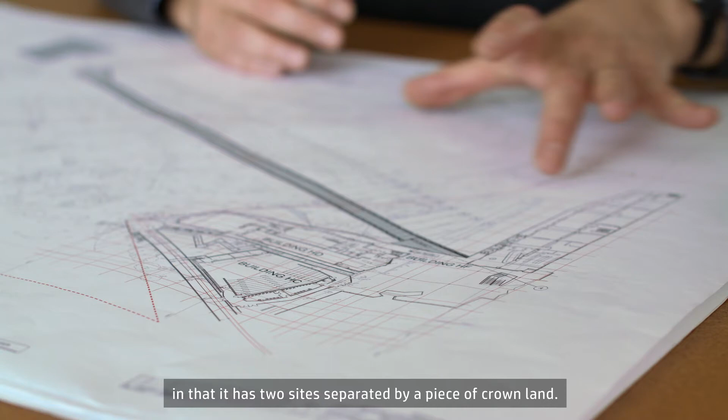The Deakin University pedestrian bridge is a link. There's a significant problem at present with the Burwood campus in that it has two sites separated by a piece of Crown land. For students or even patrons of the community to cross that Crown corridor, you have to go down to Gardeners Creek into the bushland, across a small bridge, and then make your way up a set of temporary stairs, which isn't really conducive to students with disabilities.

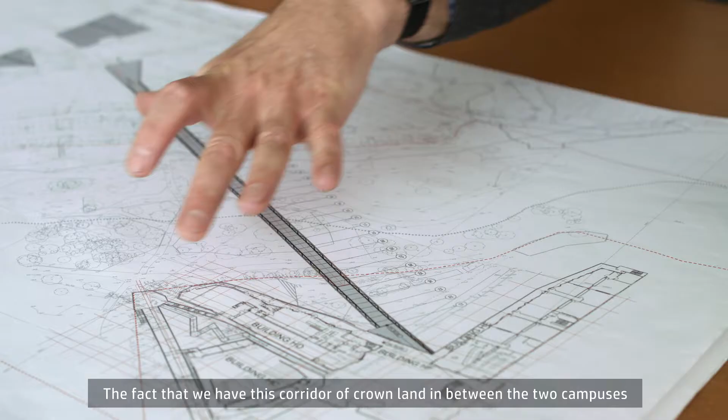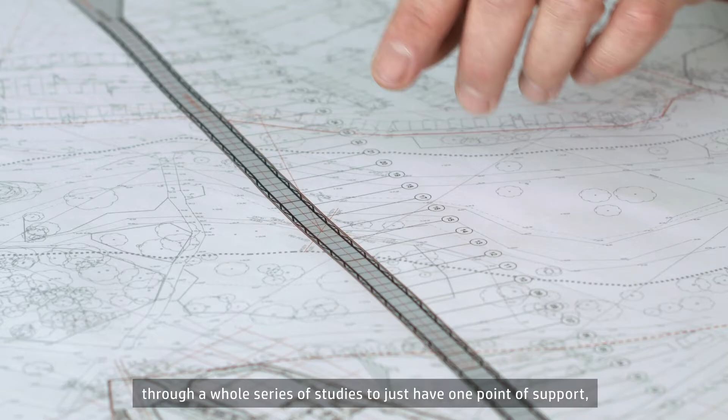The fact that we have this corridor of Crown land in between the two campuses means that Deakin or the constructors can't just go down there for a year and build a bridge. They can't put scaffolding in there, or a number of supports down there. If we didn't have to, we would ideally like to span it as a single span, unsupported. That had other problems, and the decision was made through a whole series of studies to just have one point of support, and then get permission for one point of support in that Crown land strip.

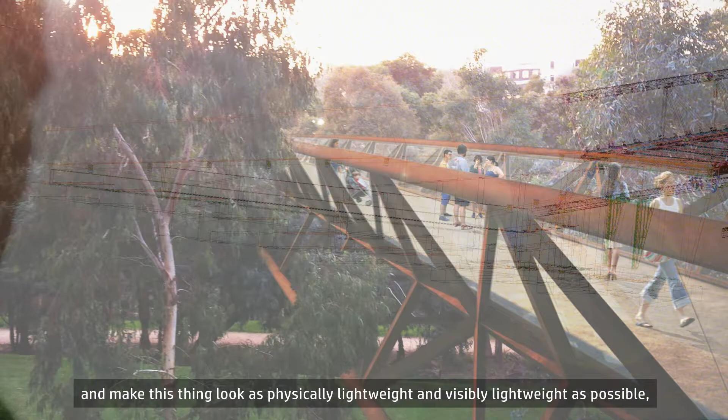This is just one of the early study models, but it gives you an idea of a section through the bridge in its 3D structural form. One of the key objectives we were trying to achieve was to make this thing look as physically and visibly lightweight as possible as it spans. And we're talking about a 200 metre long bridge.

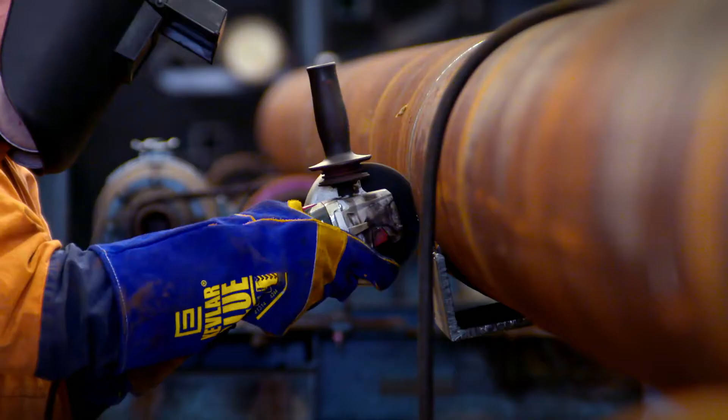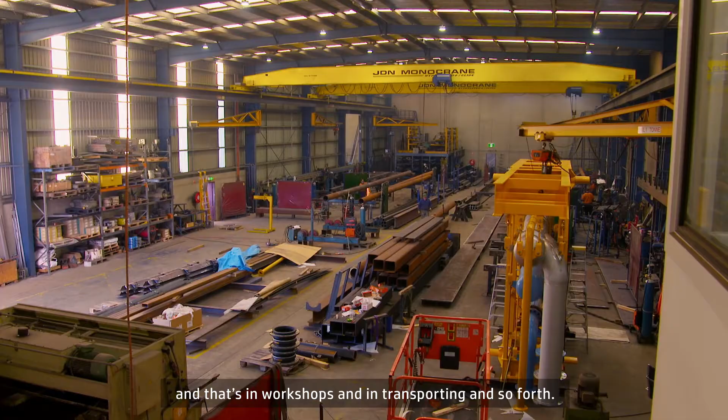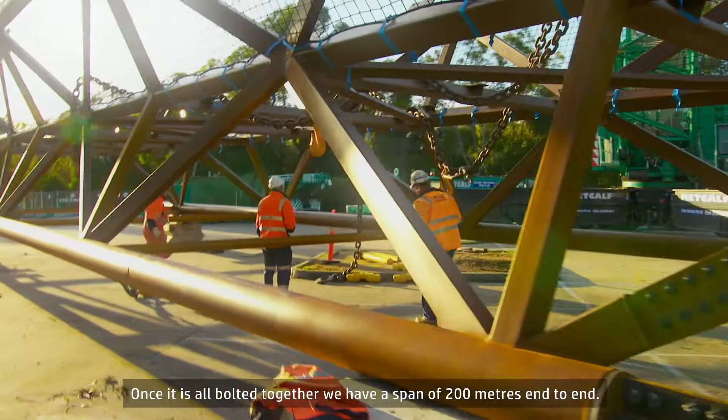From the ground up, this bridge is entirely manufactured off-site. It has been designed in a way that we looked at the maximum lengths we can fabricate off-site, in workshops and for transporting. The staging has been manufactured in the lengths required to be brought in first. Once it's all bolted together, we have a span of 200 metres end to end, bridging the gap between the two campuses.

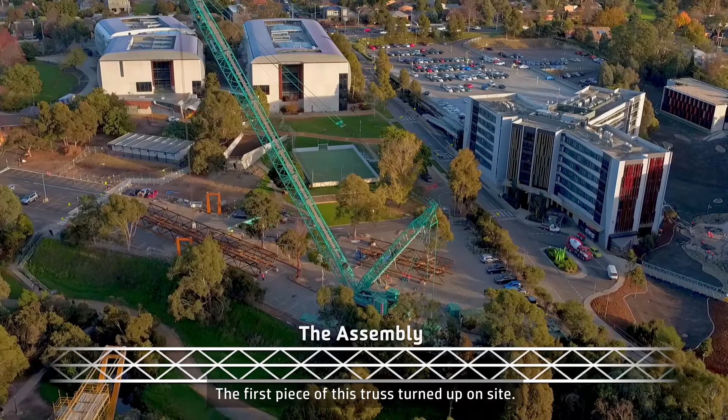The first piece of this truss turned up on site. To see it in its final state, ready to be bolted together and lifted, is a significant event after literally 14 years in the making.

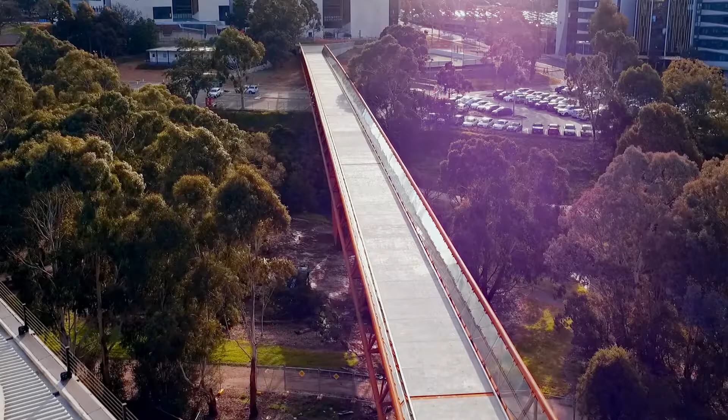Okay, well here we are, the opening of a great event for Deakin. It's been 14 years in the making, 14 years.

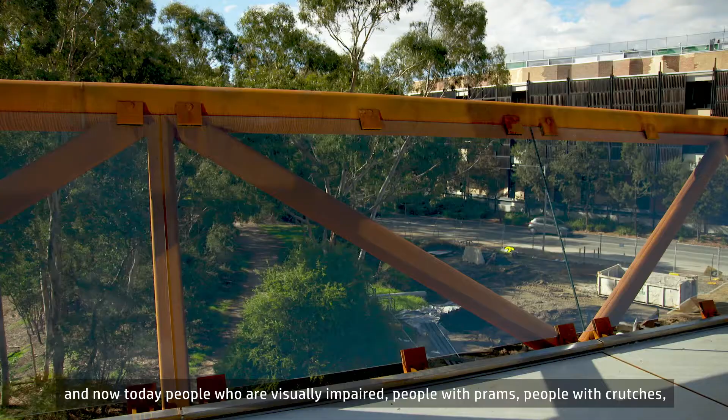Elgar Road campus has been separated from the Burwood campus. For 14 years we've been in contravention of the Disabilities Act, and now today, people who are visually impaired, people with prams, people with crutches, people in wheelchairs can walk from one side of our campus to the other in safety, in harmony with their friends. This is a great day for Deakin.

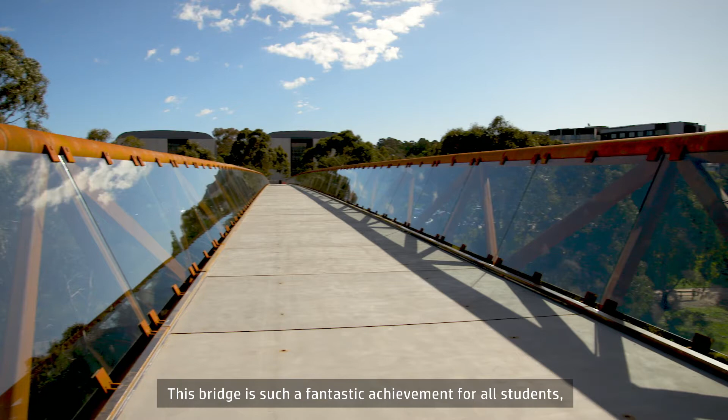This bridge is such a fantastic achievement for all students, staff and visitors to Deakin University, but it's especially significant for myself personally, and also a lot of other students who have access needs.

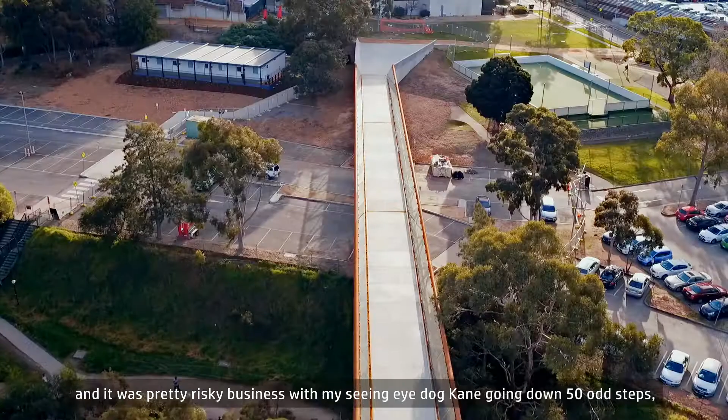I lived over on the Elgar Road campus for a couple of years, and it was pretty risky business, with my seeing eye dog Kane, going down 50 odd steps, often wet and slippery, returning home in the dark across the dirt tracks on Gardiners Trail wasn't really the safest thing to do.

This is just going to make life so secure and enjoyable for people who use wheelchairs, people like me with a seeing eye dog, others with mobility challenges, to just seamlessly go from one side of the campus right across to the other. It's wonderful.

So finally we're here. The bridge is complete. It's absolutely a magnificent structure, finally completed after 14 years of hard work and design and endeavour by a large group of people.

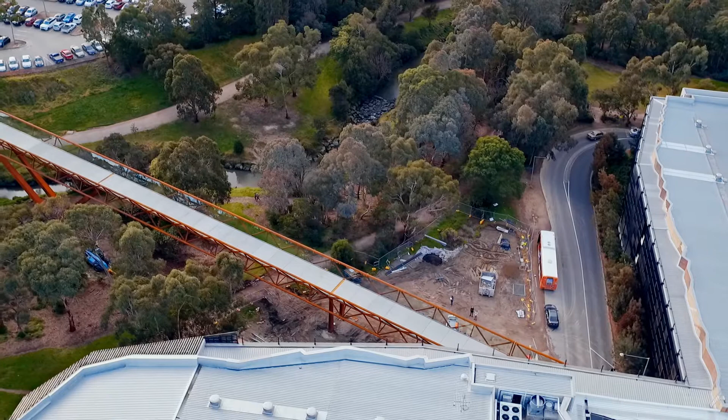This has come together through many people within the university, led by the Vice-Chancellor and Kevin Murfitt, and as well as our own people through Michael Mangus and Yvonne Yip, talking directly to Whitehorse City Council. The proof's in the pudding. It's a fantastic structure. The legacy is there for all of us to see for the next 100 years.

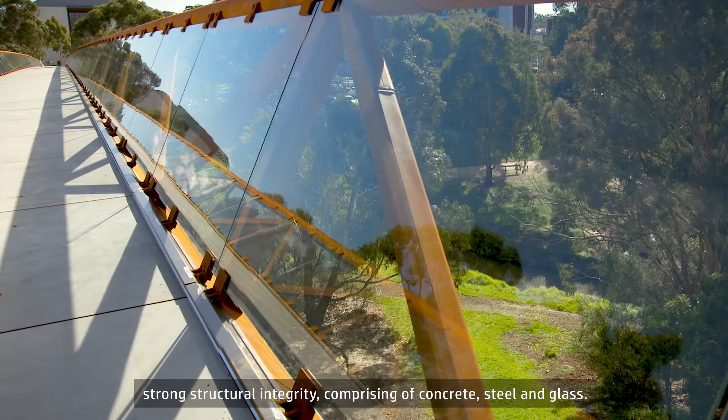Form meets function, with the three main components creating that simplistic structure of strong structural integrity comprising concrete, steel and glass. The whole thing has been exciting and enjoyable. I think any architect would relish the opportunity for a project like this. Look, I can honestly say it's been a really enjoyable process.

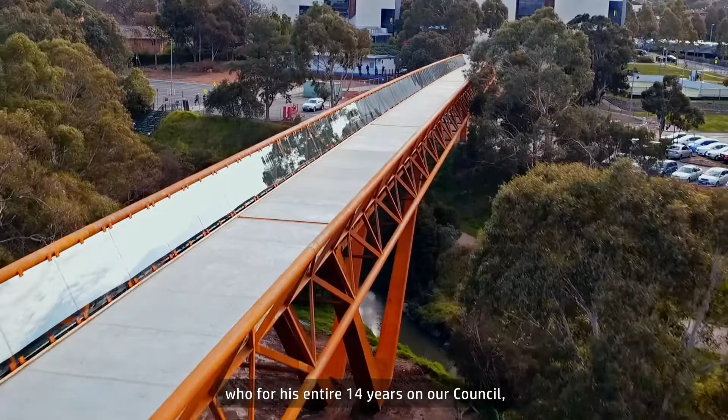We are naming this bridge after our previous Chancellor, David Morgan, who for his entire 14 years on our council campaigned for us to do something about connecting the two sides of the campus on the grounds of safety and equity. I'm delighted for David Morgan, I'm delighted for Deakin, and I congratulate everyone.

From Kevin Morfitt, who told us that it was unsafe, to the great staff who designed this bridge and built it on time, in budget. Well done, Deakin.